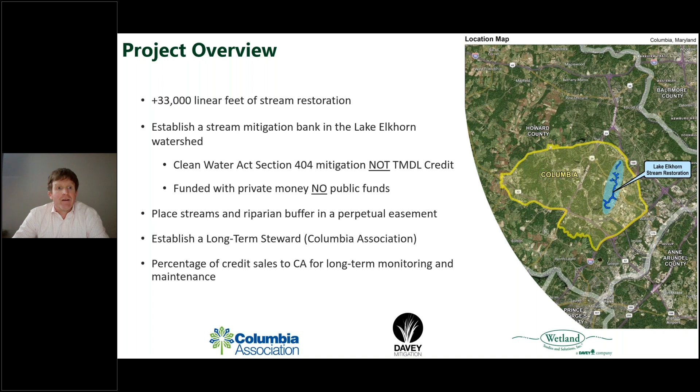So what is a mitigation bank? It is a market-oriented process, where we as a private company go ahead of time and restore streams or create wetlands, and place them in an easement. Then when a private entity or a public entity doing a public works project or a private development project impacts a stream or wetland, they need to mitigate for that and purchase credits.

It's important to note that mitigation is not a free pass for development. It's actually the third step in a permitting process. The first step is that somebody implementing a project needs to try to avoid impacting these resources. If they can't avoid them, they need to minimize their impacts to the maximum extent practical. And if they can't do that, then they have to mitigate. So it's the last step down the line.

It's also important to note that mitigation needs to be in kind. That means if you impact a wetland, you need to mitigate with a wetland. If you impact a stream, you need to mitigate with a stream. I think it's an important point to make that you can't mitigate for an impacted stream with stormwater, based on some of the comments we've seen so far.

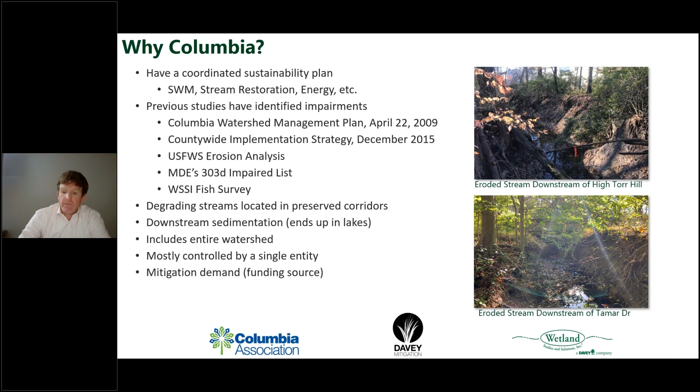When it comes down to it, what are our project goals? What we need to do, and what we want to do, is provide a functional uplift to this degraded stream system.

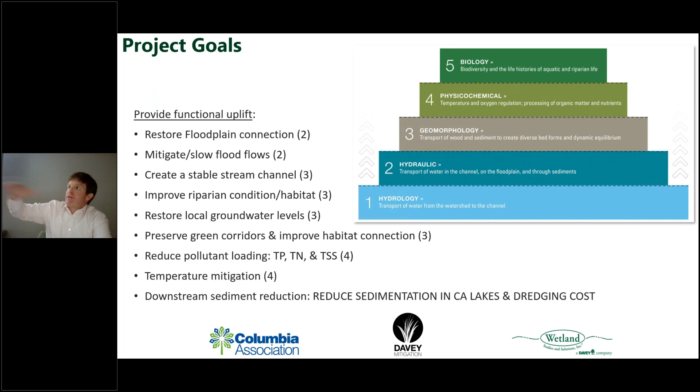As we go under the different roads and past the dams, it's segmenting the habitat through the stream corridor for the aquatic and semi-aquatic organisms, and we would like to work to restore that to facilitate that passage.

Reduce pollutant loading associated with nitrogen, phosphorus, and sediment. Mitigate temperature—we'll get to that at the end, sir. And then downstream sediment reduction.

CA spends a lot of money on dredging their lakes every few years, and we would like to, as part of this, help reduce that sedimentation in the lakes and reduce that cost.

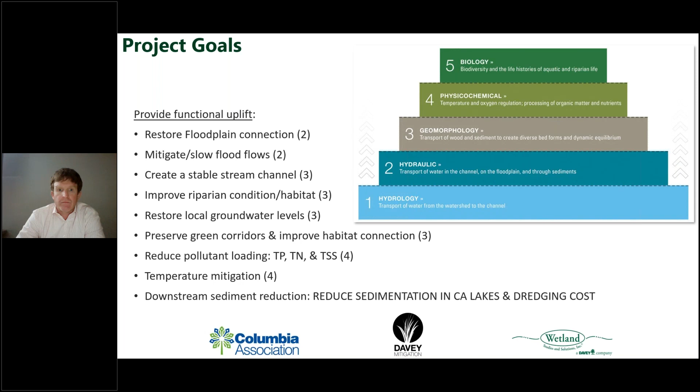Where are we in the project schedule? What you see here is an anticipated schedule, contingent on regulatory agency comments and approvals. It's important to point out no design work has been started on this project, and construction is not imminent. We are currently in the prospectus stage, which is the preliminary regulatory coordination associated with setting up this bank. That is ongoing. We would hope that we get approvals in the spring or summer of next year.

Once we do that, we move into what's called setting up the mitigation banking instrument, and that's the regulatory framework for the bank. That sets up what our success criteria are going to be, how we're going to go about the restoration, sets up financial assurances to make sure what we say is going to happen is going to happen, and also sets up the long-term stewardship program.

In conjunction with getting past the prospectus stage and ready to start the MBI, we'd like to start the existing conditions survey and design process. We hope to start that in spring or summer of 2022. Final plans and permits wouldn't be done until after MBI approval, so if things go smoothly, you're not going to expect any construction until spring or summer of 2024. So almost 3 years from now is really when you could expect it at the earliest.

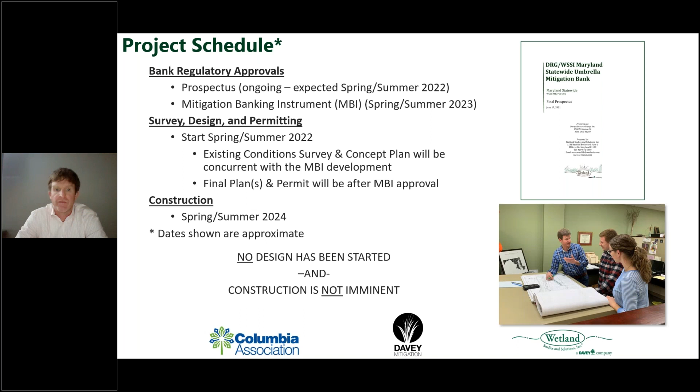Throughout this process, there will be opportunities for public comment and public engagement. We're starting this early because we want to keep you guys involved, get your comments, and have you be part of this process. We've held 5 meetings since last fall, this meeting tonight, and there's going to be a public hearing with the agencies, MDE and the Corps, on December 8th. I believe they mailed public notices to adjacent property owners at the end of last week, and it will be publicly noticed in the Howard County Times this Thursday.

Moving forward, as we get into the plan development stage, we want to have 3 review meetings with the residents per reach section. We'll hold the first meeting after we collect our existing conditions data so we can get your initial thoughts on the area. We'll then develop the concept plan and have a meeting with you to review and solicit comments. Then we'll have a meeting to review the final plans once we get to that process so we can involve you throughout. We want your comments so we can incorporate them where possible, but also give an opportunity to explain the decisions we've made and why.

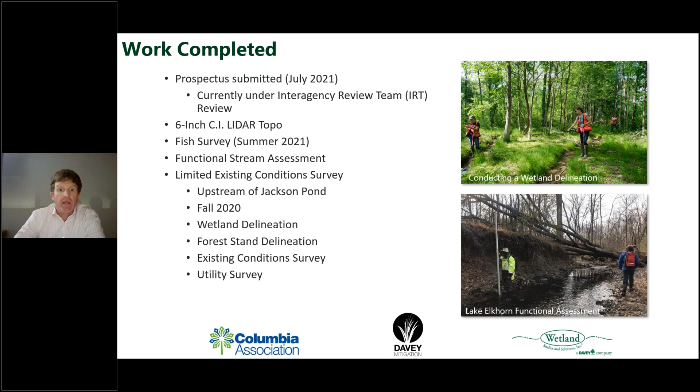So this leads to a question we've had. When you're out walking in the stream valley where we've done the survey, or where we will do the survey, you'll notice flagging. Each flagging color represents something different.

Pink are our wetland delineation flags. Red highlights trees greater than 30 inches in diameter—these are specimen trees associated with our forest stand delineation. Orange is our survey control, and blue marks the limits of the tree survey.

In addition to what's required for the forest stand delineation, we're going to survey trees greater than or equal to 12 inches diameter at breast height—that's the diameter of the tree at about 4.5 feet off the ground. This helps us with planning so we can try to avoid some of these larger trees.

We're doing this within 50 feet of each stream bank on CA property. If you see those blue flags, that notes the boundaries of the tree survey. As part of the survey, these trees will be ID'd, tagged, and we'll do a health assessment, then survey locate them. This is done by ISA certified arborists on staff, as well as TRAQ certified arborists, which are tree risk assessment qualified.

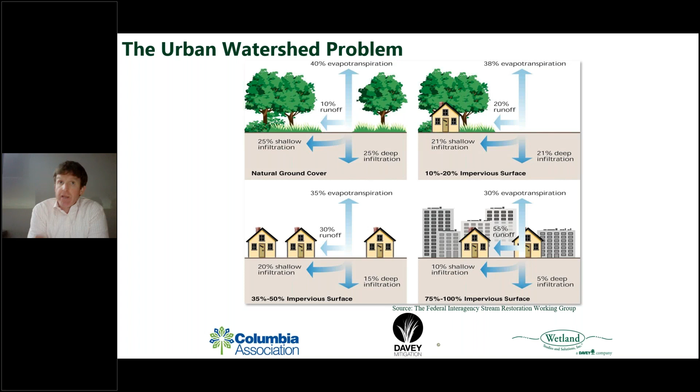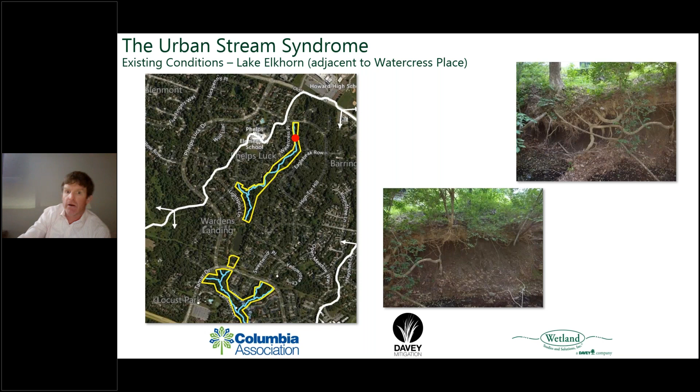This is what you see as you're going down through. We've taken representative photos starting at High Torr Hill and going all the way down to Oakland Mills Road. You'll see the map on one side with a little red dot showing where we are. This one's up by Watercress Place, then as we go down through Tamar Drive, a little farther down adjacent to Rouse Parkway, and another adjacent to Rouse Parkway.

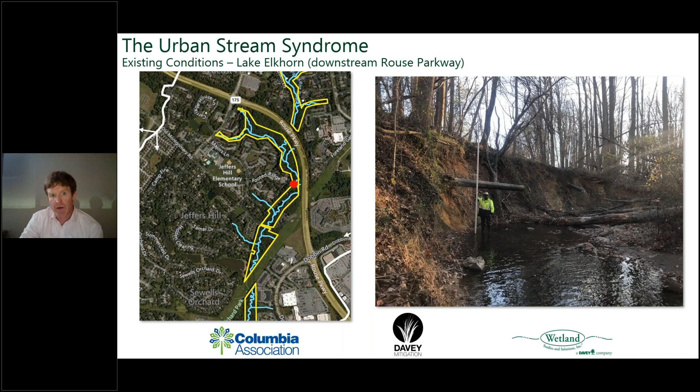This is a tributary coming in from Dobbin Road, and this is upstream of Oakland Mills Road. So that's how it works its way down through.

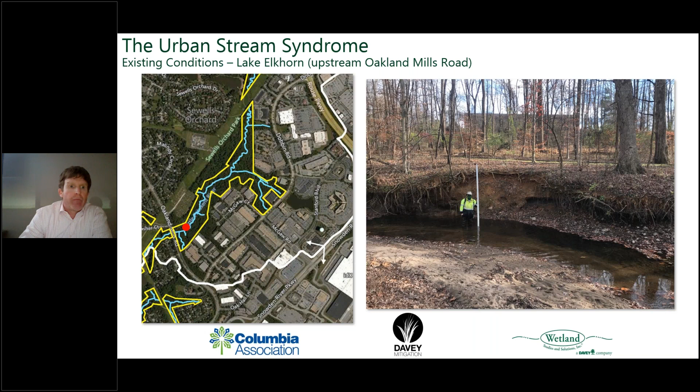So then how do we deal with this? It really needs to be dealt with in multiple ways. One way is watershed improvements—Columbia has programs in place to address stormwater at the source, by removing impervious surfaces and replacing them with pervious surfaces. These are some examples from our office headquarters in Gainesville, Virginia—different types of pervious pavement, as well as a green roof.

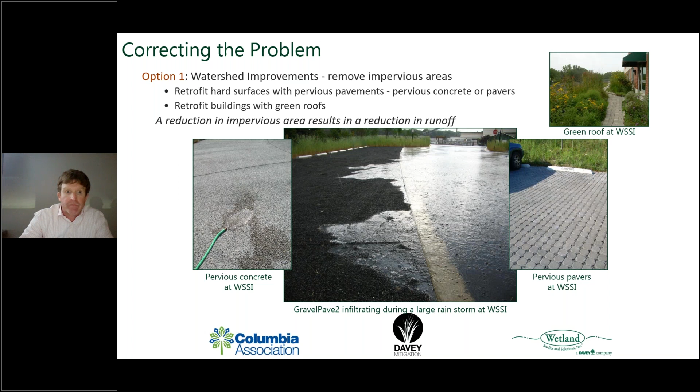Another way is through stormwater management, either traditional stormwater management—we all know what a stormwater pond looks like—as well as green roofs, water quality swales, and bioretention basins. That's how you deal with it at the source, and that's something Columbia Association is working on, which is one reason why we like this area as a stream restoration spot.

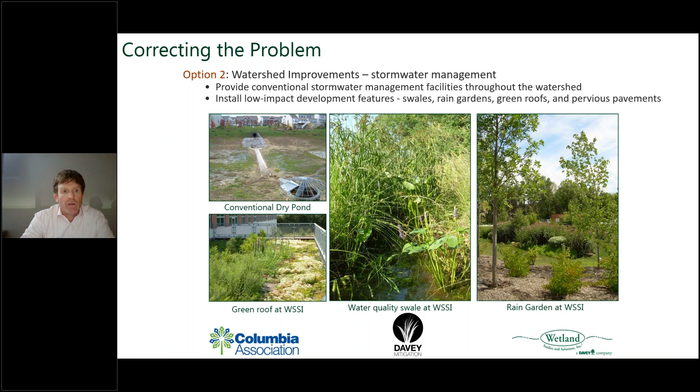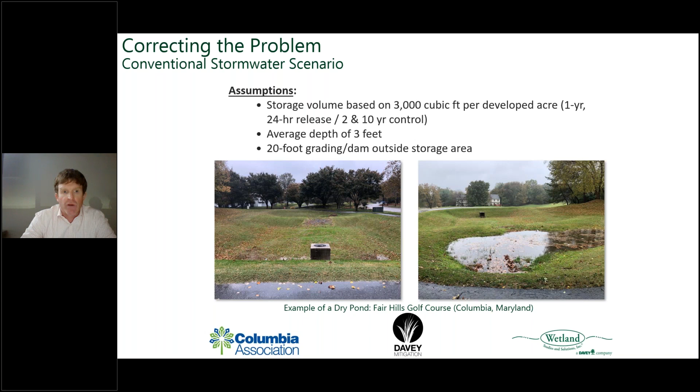They have done some work and are continuing to do more, but we wanted to get an idea of the scale needed to treat the whole watershed. John mentioned last week in his presentation that we did a hypothetical scenario using the drainage area and some traditional stormwater requirements from a project we had in Virginia, the Reston project. So we looked first at how many stormwater ponds would be needed to treat this watershed.

Sorry, something popped up—can you guys still see? I went ahead and disabled your webcam because we're having slow internet issues. Okay, thank you. Mike's my IT guru today.

So we first did a conventional stormwater scenario, based on a storage volume of 3,000 cubic feet per developed acre, controlling the 1-year storm with a 24-hour release, a pond with an average depth of 3 feet, and 20 feet of grading outside the storage area.

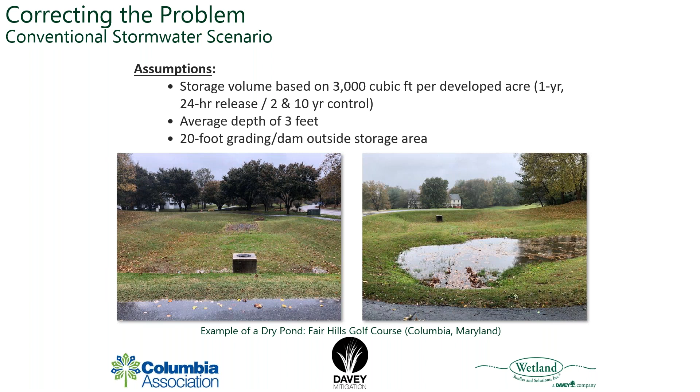This is what we came up with: you would need 75 ponds. The area shown in green is the green space in this watershed, currently primarily forested. So if you're going to do this, you would have to put it on public space, not in people's backyards. This is kind of how it would lay out, and this is what 75 ponds to treat all that impervious acreage looks like. It would result in about 29 acres of disturbance.

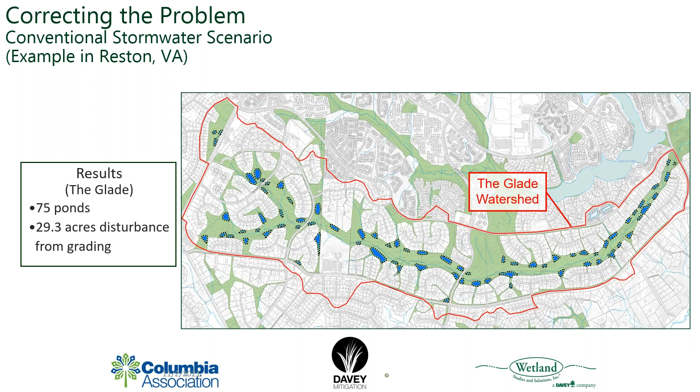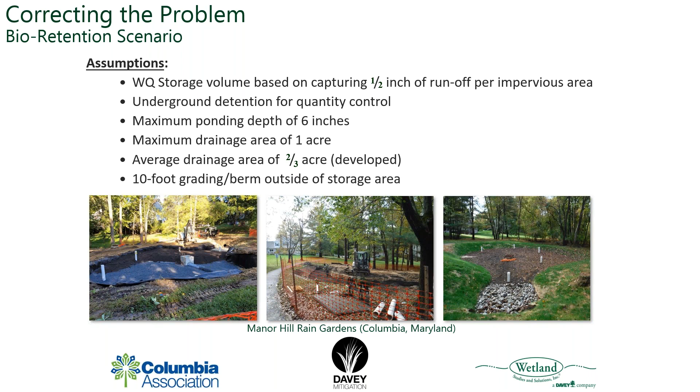The second scenario we looked at was how many bioretention basins we would need to install to treat that same area. The bottom shows an example of the Manor Hill rain garden here in Columbia, Maryland. What we came up with is you would need 830 bioretention facilities to treat all the impervious surfaces, and that's about 37 acres of disturbance from grading that would need to be done.

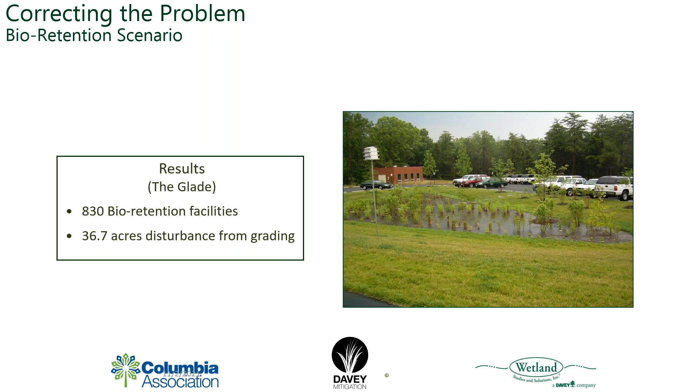As I mentioned, that was on a watershed we worked on in Reston, Virginia. The drainage area for that was 780 acres. The drainage area for our project here is about 1,700, so about 2.5 times larger. The glade is only 14.6% impervious, while the Elkhorn branch is 31.4% impervious. If you extrapolate that, the stormwater ponds would result in about 90 acres of disturbance, and about 110 acres of disturbance for the bioretention basins. What we are currently estimating preliminarily for the stream restoration is about 50 acres of disturbance for comparison.

We're not saying this to discourage stormwater management, like I 100% want it, and we chose this because Columbia is doing this, but it will require an impact to open space areas and people's backyards to get this to happen.

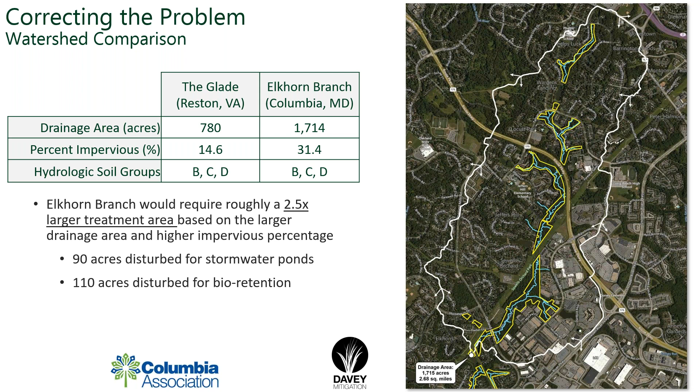So the other option, the one we're pursuing, is the stream restoration option. There are a couple different ways to go about it. Some people call it floodplain or base flow restoration, where they cut down the entire floodplain and restore the stream at its existing grade. This method has its merits, but in an urban area like Columbia that has trees, it would result in many trees removed and large volumes of cut material. So that is not the approach we want to take.

What we intend to do is raise the stream bed and connect it to its existing floodplain. It allows us to balance cut and fill as we're doing that, but it also allows us to minimize our impact to the surrounding riparian area.

Correct, cut and fill - that's the dirt you would need to kind of raise the stream. There are areas where the stream comes out of the culverts where the culverts are a little lower; in those areas we may have to stabilize the stream in place, because you're not going to be able to raise it up and back water up through the culvert. But you'll see that as we go down through.

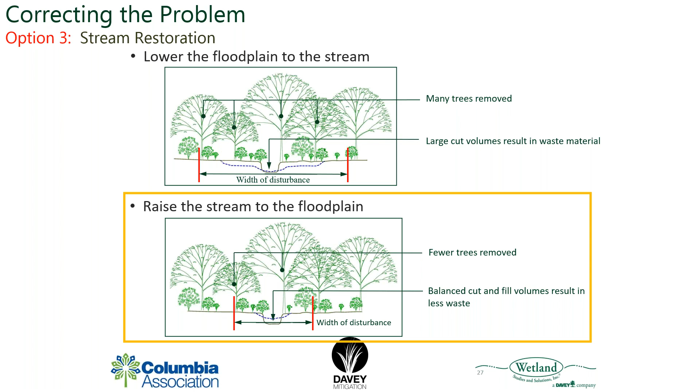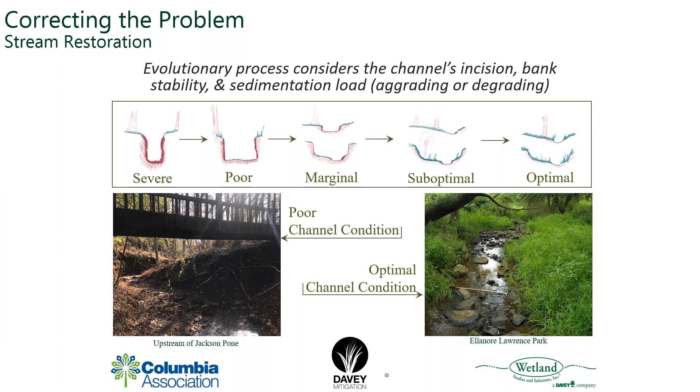Two general design approaches that we plan to take: one is natural channel design, where we're going to try to restore the stream by mimicking, to the maximum extent practical, a natural stable stream. The second is what's called a step pool stormwater conveyance, a method we'll use primarily at the downstream end of stormwater outfalls to try to treat the water a little bit when it comes out. It's a series of step pools downstream of the outfall, underlaid with a sand and wood chip filter mix, so during smaller storm events, the water flows through and can filter down through that mix of material.

We definitely need to consider site constraints. Sometimes when you hear about stream restoration, people restore the pattern and make kind of large adjustments to the stream pattern and how it flows and meanders. Given the site constraints of where we are, we're generally probably going to have to follow the existing pattern because we don't want to have to cut down lots of trees. We want to see what we can do to stabilize it or restore it in place.

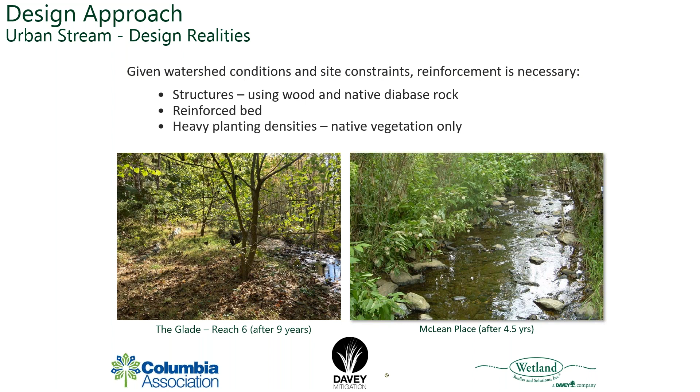So how do we see the design approach going? First things first, we need to get the existing conditions surveyed. That's the first step. And as I mentioned, once we get done that existing conditions survey, we're going to have a meeting with interested residents. We're going to review it, discuss the project and get initial comments on it. Then we'll get into the design process where we want to determine what the stable dimensions of the stream channel are. So what the bankfull width, depth, and area need to be.

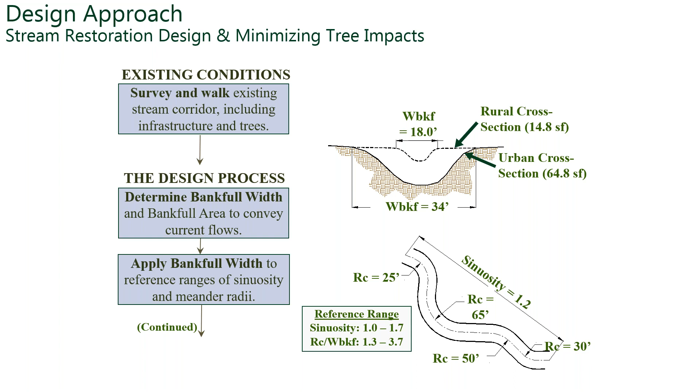And when I say bankfull, that's the point at which the stream fills up and flows out into its floodplain. And then we'll apply that and come up with stable channel dimensions and a stable design. It's important to note that this is an iterative process. Once we get done that initial concept layout, we will meet with you again, review it and discuss it. We'll see it out in the field and we'll adjust it as necessary moving forward. So it may take a couple iterations to get from that concept design to the final design.

And then that last step on the schematic says contractor and arborist field review. So even once we get the layout approved, get all our design approvals and get ready to start, we actually walk the limits of disturbance and see where we can make adjustments in the field to save additional trees or minimize our impacts. Sometimes you'll see something on a plan view and it'll look good, but when you get out in the field, it's not exactly how it is. So we need to make adjustments. So again, iterative process.

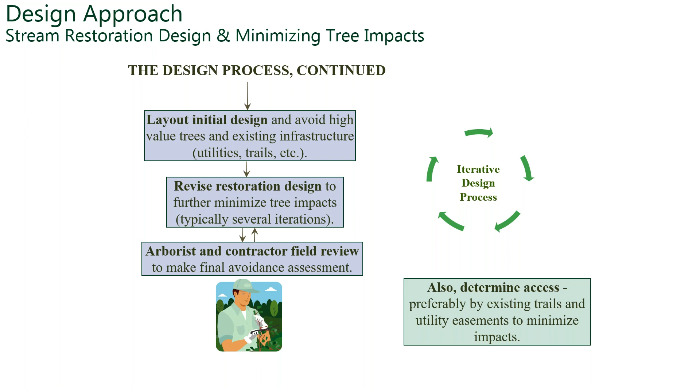We've started and we'll be continuing to do an extensive tree survey. We consider a lot of things when we're designing a stream and determining if one of the surveyed trees needs to go. We're looking at size and diameter. We're looking at what type of tree it is. Is it a climax species or is it a quick growing, more early successional species? What's its existing condition? Is it undercut and is it going to fall? Short life expectancy afterwards? Is it dead, dying, or diseased?

And then, what kind of impact has there been around it, like the utilities or the road? Has development in the area already doomed the tree? And then finally, what's the proposed condition going to be? We are going to have to go in there as part of construction with equipment. There could be some impacts to the trees.

And what we don't want to do is endanger anybody. So if as part of the construction, we think that a tree is going to become damaged and die later on and fall, we might want to take that on the front end as opposed to risking that it dies, somebody doesn't catch it, and it could hurt somebody later.

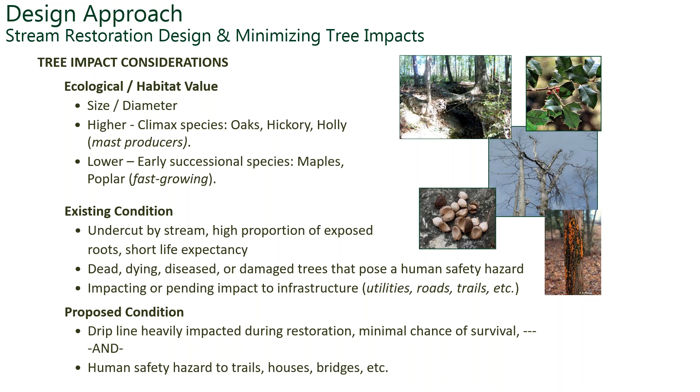So what are some of the other things? So tree clears will be, put in parentheses here, recycled. So we use them as in-stream habitat features, overhead cover. We use them as grade control structures. Some of the brush material can be chipped up and used on natural surface trails around Columbia.

And one of the things we did in Reston is we chopped up the trees that we couldn't use as part of the project that needed to come down. We chopped them up for firewood and distributed it to the residents that wanted it. That's something that we've offered to CA and said, coordinate through you. And if that's amenable to everybody, we'll do it.

One of the other items I mentioned, under the center schematic, is we're going to raise up the incised stream channel to the floodplain. And this is good because it brings up the local groundwater table. So as a stream becomes incised, the groundwater kind of follows the gravity as well. So when a stream's incised, the water drops down to that lower level. So it misses the root systems of a lot of the adjacent riparian trees.

So a lot of the trees you see that are hanging on the stream bank with their roots above the water level, their roots are not involved in nutrient processing. The water is actually cut below it, so they're not actually providing much stability either. So we want to bring the stream up, and that brings that kind of groundwater stream flow interaction and increases it.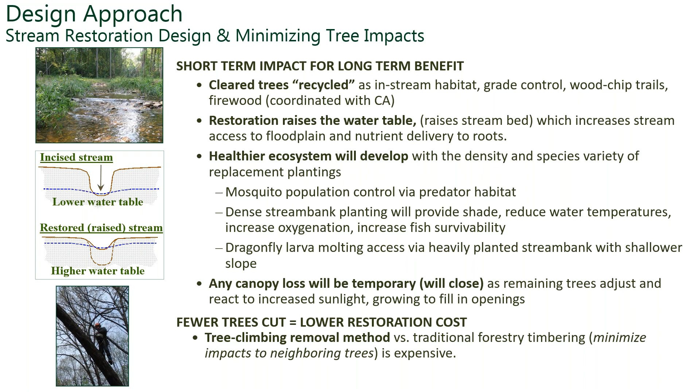So one of the things we mentioned is we want to establish a stable cross section. So as you know, the flows have increased in these areas, and the substrate that's in these cross sections hasn't been able to withstand the flows. So we size it based on what's the bankfull flow. So we look at regional equations and hydrologic models and figure out when the stream should overtop its banks. And that's how we develop our cross-section shape and size.

We also look at dimensionless ratios developed from natural stable channels, and look at the width compared to the depth and size it that way. And then what we do is we make what's called a constructed riffle material. So it's a mix of kind of a crushed rock that's anywhere between 6 and 12 inches in diameter. And then with that, we mix in cobbles, gravels, a little bit of sand, and a little bit of topsoil. And that creates this natural stable material that we can put in the riffles, and it will withstand the flow rates that these streams experience.

And I think an important point is what you'll notice, and you'll see in this pile, is sometimes you see stream restoration projects where people just put in that crushed rock component and not all the other fines and cobbles and gravels. So we do a mix, and from an aesthetic standpoint as well as a functional standpoint, it does look better.

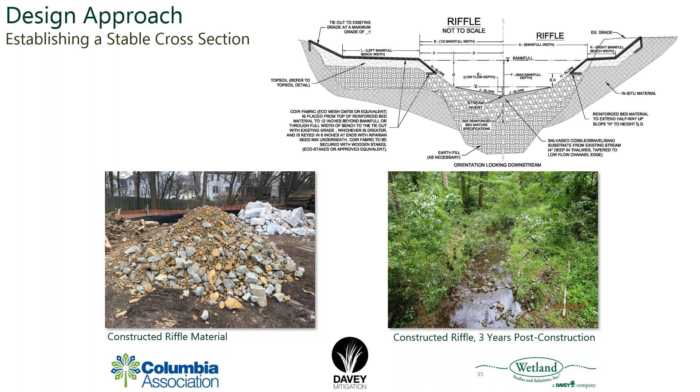So here's a couple examples of some floodplain reconnection. This is a 4-year-old project that we did at an outfall in Chevy Chase, Maryland, off of Chevy Chase Lakes Drive. I'm going to stand up. So there's the outfall in that photo, and then you can kind of see the outfall in the photo on the right. And we raised that up. It's about 4 years old. And then this is another one where I think is a really good example of how we were able to work amongst the existing tree canopy and minimize tree removal.

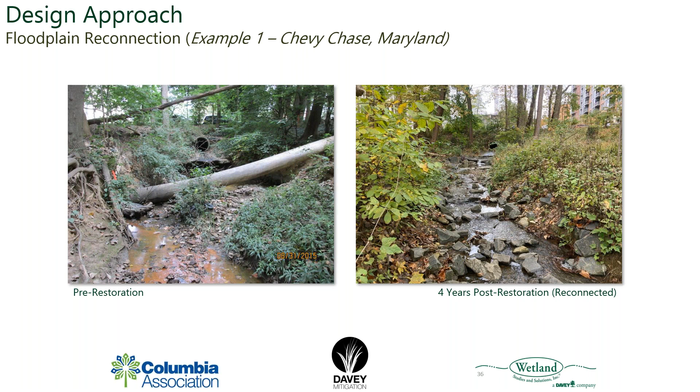Here's another one we did in Reston, Virginia. On the picture all the way to the left, you'll notice the red arrow in all these pictures is pointing to the same tree. So you've got the pre-restoration condition, you've got it 1 month post-restoration, and then you've got it about 2 weeks ago all the way on the right. So you'll see it's stable. The trees are preserved, and shading was maximized.

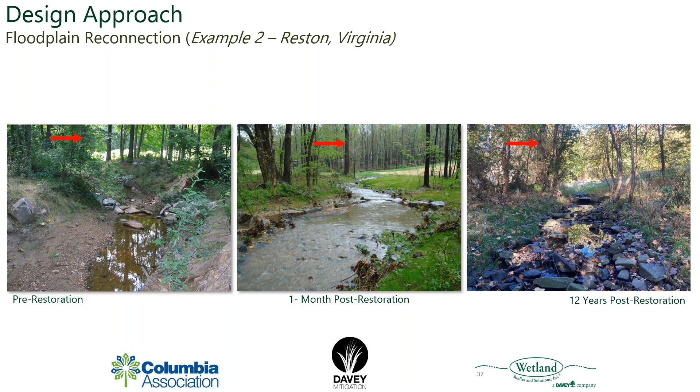So I mentioned an important point is the revegetation. When you look at a set of our plans, this is a large portion of it, and we break it down into a couple different areas. We have the riparian buffer area, which is at the top of the stream bank, what I would call landward, and then we've got the stream bank areas. This just kind of shows you how we break it down. And we're also very prescriptive with how we want our planting contractor to plant it. Besides the color diagram, I've got two examples of what our stream planting details look like and how we try to have them laid out.

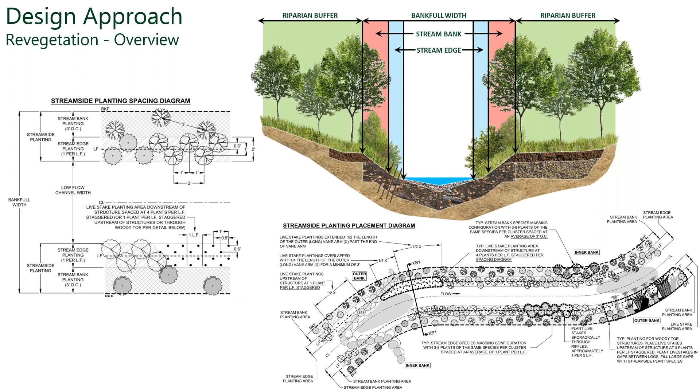As part of it, in the riparian zone, we prefer to use gallon-sized container trees when we replant. As part of our mitigation requirements, we're going to need to have 460 stems per acre survive. So based on that, we plant around 640 stems per acre. So we overplant to account for die-off and disease. These quantities and this percentage that we had to overplant is based off of research from Christopher Newport University as well as the Virginia Institute of Marine Science, where they looked at the survivability in mitigation projects of different size plantings. They looked at bare roots, tubelings, and gallon size. So based on that research, that's how we selected how many we have to put in.

As an example planting, if we do 3,500 linear feet of restoration, you're looking at about 4,100 trees, 6,000 shrubs, and 7,000 what we call live stakes would go in. So that's about how heavy the planting is. And then at the bottom, I've got a list of the different species that are in our planting schedule. I'm not going to read them all, but I'll leave them there.

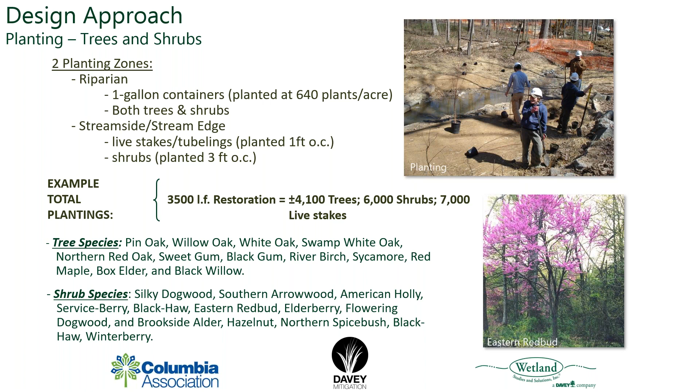In addition to that, we do seed immediately. We apply a seed mix at a rate of 125 pounds per acre as soon as an area is done grading. This includes not only our perennial species that we want to last, but also cool and warm season erosion control mixes. It's important for stability to get the erosion control species up immediately. And it's also important for trying to temper any colonization by invasive species. And in addition to the erosion control grasses, those are some of the other plant species that we have in our mix.

So here's an example of a project and the progression of the revegetation. This was one where, given the utilities and alignment, a lot of clearing had been done. You'll see it 3 months after construction where it's just E&S grasses. The photo in the top right is about 1.5 years, so you're starting to see native plants and trees pop up. Then 6 years post restoration, and the bottom one was about 2 weeks ago, so you'll see how the tree cover comes back.

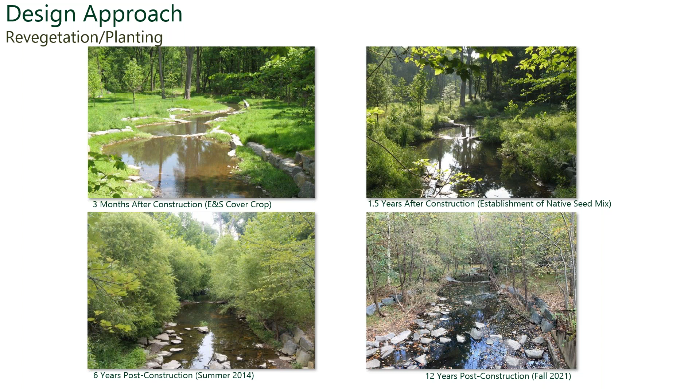These projects and plans are going to be heavily scrutinized. As part of the banking process, we need to go through the interagency review team. The agencies on that are listed up there, the Corps and MDE and others. In addition, once we get those approvals, we need to get wetlands and waterways approvals from the Corps of Engineers and the Maryland Department of the Environment. That's separate from their IRT involvement.

We'll need to get grading permits from Howard County, erosion and sediment control approvals from the Howard County Soil Conservation District. Some of the lower areas have FEMA floodplains, so we will need FEMA and Howard County coordination for that. When we get to construction, we'll have to do a National Pollutant Discharge Elimination System permit through MDE. On top of that, as part of the wetland and waterways process, you've got the EPA, U.S. Fish and Wildlife Service, Maryland DNR, and Native American tribes that are all commenting agencies on our wetland and waterways permit. So these projects throughout the design and permitting process are heavily scrutinized.

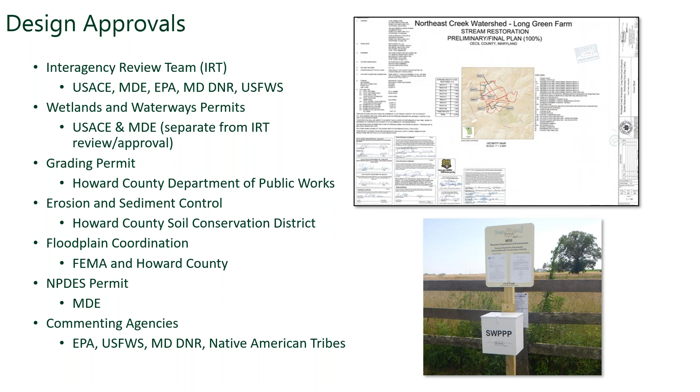I think it's important, where trails need to be utilized, we recognize that they're important to how Columbia residents get around. So if we get into an area, this is going to be a big point of discussion on whether we need to use the trails, and if we do, how do we accommodate the citizens. We'll work with Columbia Association, the villages, and individual citizens to minimize that impact.

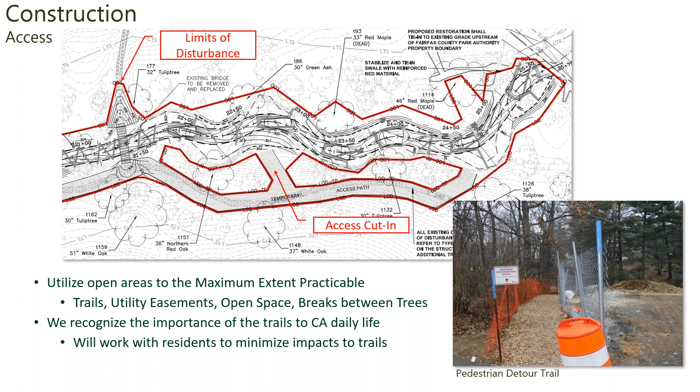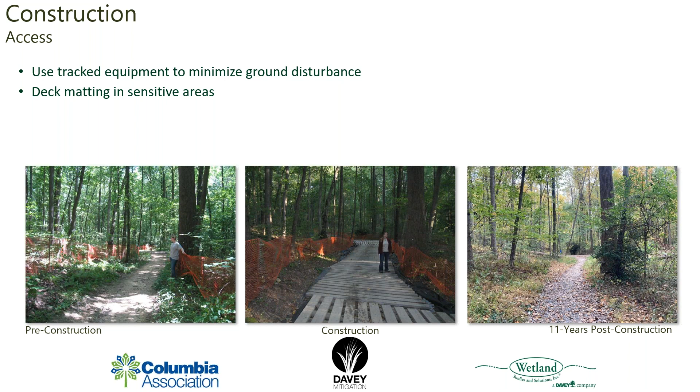Through sensitive areas, we use deck mats. Here's a good example of construction access. This is pre-construction. The deck mattings are placed down during construction. While we do use tracked equipment, which minimizes ground pressure and disturbance, we also use these deck mats in sensitive areas to further minimize ground disturbance. Because it's heavy equipment, things do get torn up, but we try to minimize it where we can, where we're traveling. This is that same area - you look at pre-restoration, and then this is it, a couple weeks ago, on the bottom right.

These are some photos of construction. The track hoe working right next to the trees. In some cases, in the middle, we'll use the stream as access. During construction, we use pump around practices, so we don't work in the wet, to minimize sediment transport downstream during construction.

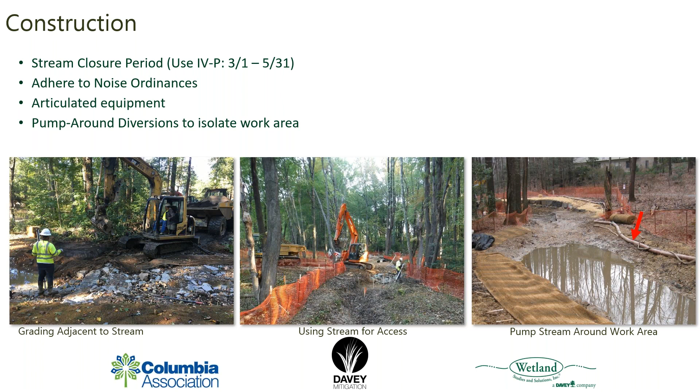In Maryland, we are subject to time of year restrictions. This stream is what's called a Use IV-P - it's a recreational trout water, and the P stands for public water supply. So between March 1st and May 31st, we're not allowed to do any in-stream construction work. We'll adhere to noise ordinances. We use articulated equipment, which spins on its axis, so it can come in, spin, and back out without having to turn around.

Once we are done with construction, we're going to be required to do 10 years of monitoring and maintenance. Exactly what goes into that will be developed with the IRT as part of our MBI process - that's after we get our prospectus, we develop this mitigation banking instrument, and the monitoring and maintenance is in that. The criteria will show how we have met our functional uplift goals, and our credit releases will be based on that. So if we don't meet our goals, we don't get the mitigation credit to sell. We have to perform.

Just some example monitoring criteria, what could be required, comes from experience on previous projects, is documenting structural stability, showing that we've established the vegetation, both herbaceous cover as well as stems per acre with the trees, and then some level of invasive species requirements. And then if the criteria is not met, one, we need to fix it, and two, we don't get that mitigation credit until we can prove that that has been met.

And then once that 10-year monitoring period is done, what's called a long-term monitoring plan goes into effect, taken over by a long-term steward, which will be, in this case, Columbia Association, and that will be funded through a percentage of the credit sale. So they get a breakdown so that they're not stuck with the bill.

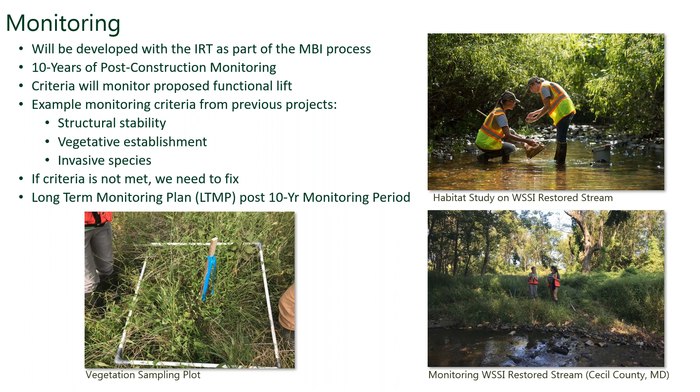We do recognize that invasive species control is critical. It goes into our planning. We think about it often, and it's challenging. They're there now, there's a seed source where it is. We are not dealing with the entire riparian area, so there will be pressure from outside our project area when we open it up.

So certain things we do to try to stay on top of that: rapid vegetative establishment with erosion control grasses leading to perennial species. Before our contractors bring any equipment onto the site, they need to clean their equipment. They can't just go from a site up in Frederick and bring it down here. They need to clean it to minimize the transport. When our planting contractor comes in, we inspect the nursery stock. And then if we do start seeing species, it's early treatment. In addition, we'll work with Columbia Association groups, like the Weed Warriors, as well as CA staff.

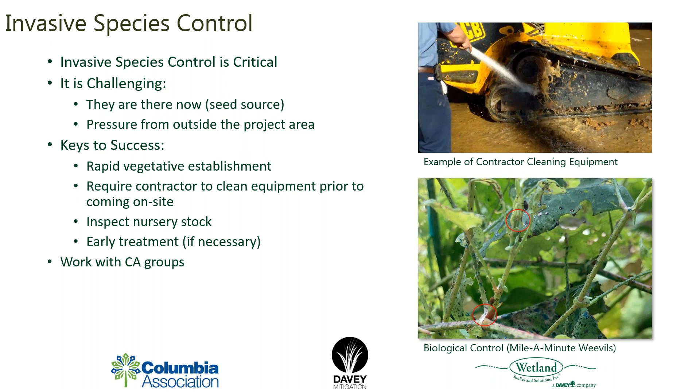So, talk a little bit about what we call the Northern Virginia Stream Restoration Bank. That's 11 miles of stream restoration we did in Reston, Virginia. It's a planned community similar to Columbia, was built in the 1960s. They preserved their stream valleys. There was limited stormwater management. In the 10-plus years since it's been constructed, from a banking standpoint, it's met its success criteria.

In addition to that, we've actually documented that we created, this was a stream restoration project, and what we did was, like here, we raised the stream channel up. And we created about 25 acres of wetlands, forested wetlands. So not the vernal pools that I know is a point of contention, but the forested wetland area along the stream. The canopy is closed in areas where we did have to take down some trees. And then our success has allowed us to get some additional funding to monitor some research.

Some things we're looking at are how freshwater mussels affect water quality in some of these stream channels, the effect of bioengineered outfalls, invasive species control and how to do that, and we're also working with USGS to monitor urban hydrology.

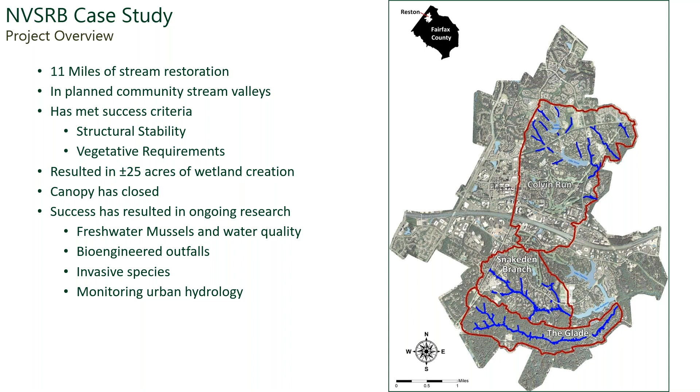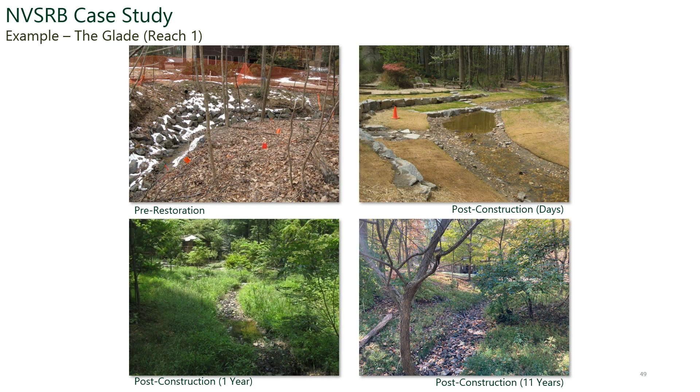So just some photos, again I mentioned it was real close to similar areas, Columbia. This is an area where the stream was really close to a neighbor's house and actually went onto his property. When we proposed to move it off, he was upset, he wanted to stay where it was. So we stabilized it on his property. We did have to put in a small imbricated wall to minimize grading. But then you can see it one year after post-construction, and then what it looks like now, 11 years on.

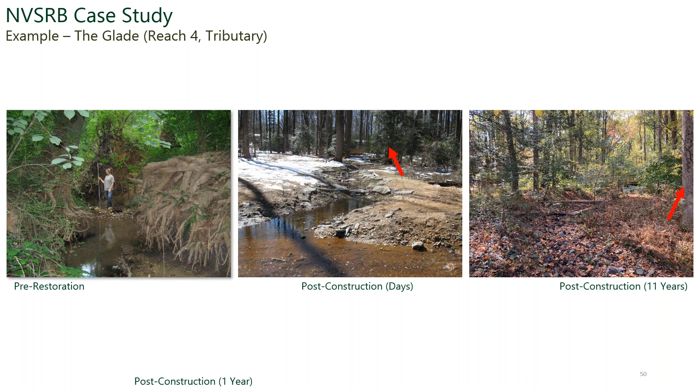This was another small tributary that came down from a church parking lot. The woman in the left-hand photo is about 5'10" tall, so you can see her standing in this tributary. We restored it to the existing floodplain. You'll see it post-construction in the center, and then you'll see it about 2 weeks ago. I'm pointing, the red arrow points to the same tree in all those photos.

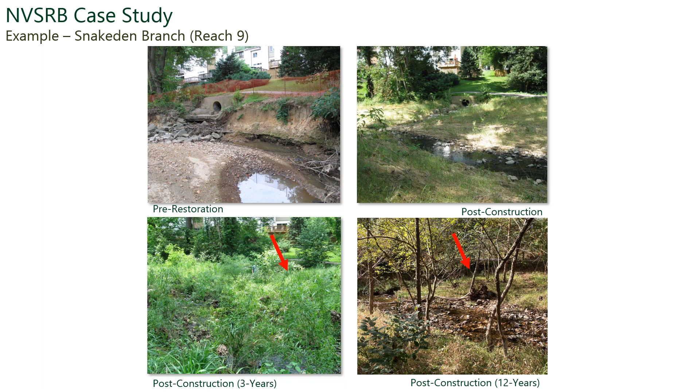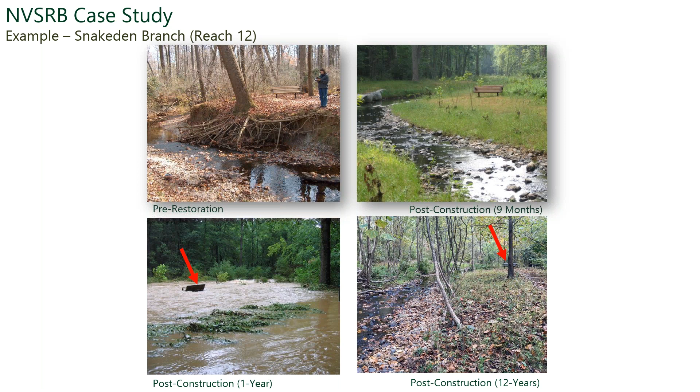You'll see the restored condition in the upper right, and there's that bench again. This was a storm event it received just after construction, again pointing to the bench. And then there's that bench just the other week. You'll see that the stream is still stable, the bed is still in place, and the trees are growing in.

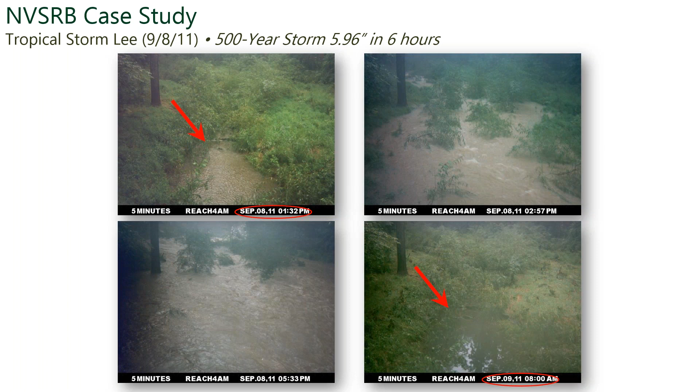In the 10-plus years it's been restored, we've seen some large storms. Here is Tropical Storm Lee, from about 10 years ago. When we got done restoring it, we put habitat cameras in certain spots around the watershed, taking images at 5-minute intervals so we could see how the stream was responding to these storm events. You'll see the water comes up, and the tree on the left side of the picture is about 3 feet above the stream bed. The arrow is pointing to an in-stream structure, and the water came up over 3 feet deep in some spots. Here it is the other week, with that same arrow pointing to that same structure, and you'll see it's stable behind it. That is a concern of some, how it responds to these larger storm events, and if it's designed correctly and robustly, it can handle these events.

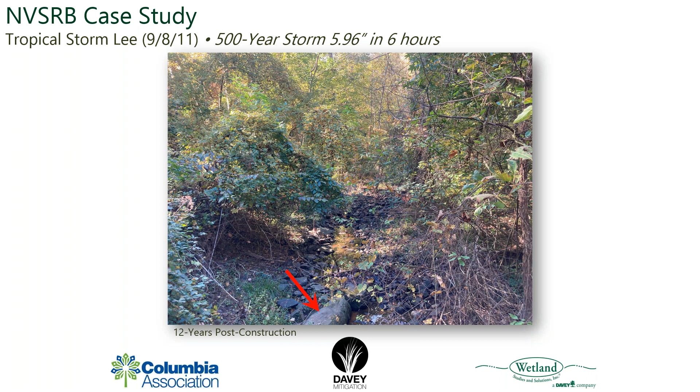Thank you for allowing me the time to walk through some of the basics of this project. I know there are going to be some questions that we didn't answer. We'll try to answer them now during the question and answer period, as well as during our written response. Please check our project website, which will be continually updated with project information, and feel free to reach out on our project email. We'd be happy to speak with you.

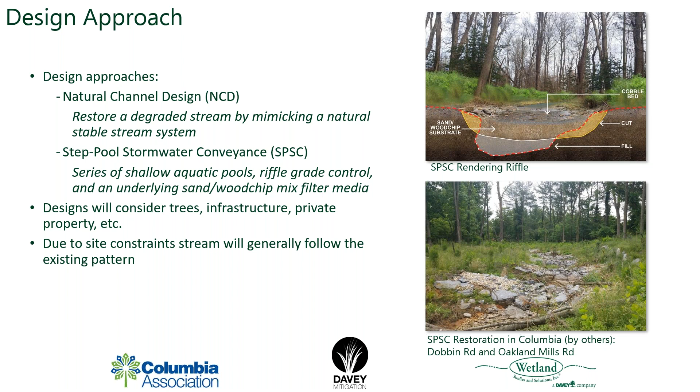Okay, so I want to revert back to the schedule that I presented earlier. We are currently in what is the prospectus review process. That's the initial documentation of the bank that is currently under review. We're going to get comments based on the public notice that people received back in the summer, as well as all the comments received through the public hearing that'll be held on December 8th.

We'll have to respond to that, and that's not going to get approved till spring, maybe summer of next year. At that time, once that's approved, that's when we'll get into the existing condition survey, as well as the preliminary plan development. So to answer the question, survey and design is not going to start till spring or summer. It will be summer, fall 2022 till we have something to sit down and discuss with residents with respect to the existing conditions and potential solutions to the stream in their area.

So, okay, Mandy had a question. I did see some trees come down this storm. I think my rain gauge said 2.5 or 2.75 inches on Friday, so it was definitely a significant storm.